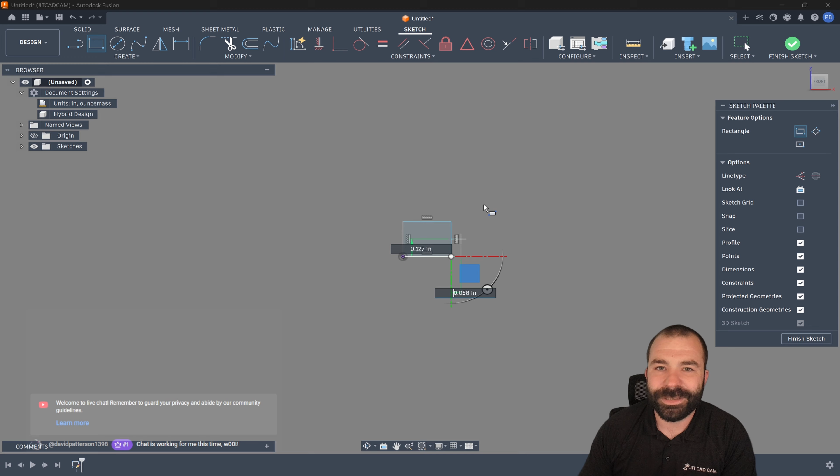As you guys are going to see, we're going to start right off with creating a sketch. This is going to be a side profile. There we go, we got David out there, David's got chat working this time. Again, relatively simple, maybe a little bit here, a little bit there, another rectangle for the taper here.

And then lastly, let's just go ahead and say we have a threaded portion, and we're going to throw a line in here. For the sake of most things here, we're actually going to turn off 3D Sketch because the word on the street is we don't need it. But I'm going to go ahead and dimension the length of this guy real quick, and let's just say it's going to be an 18-inch barrel.

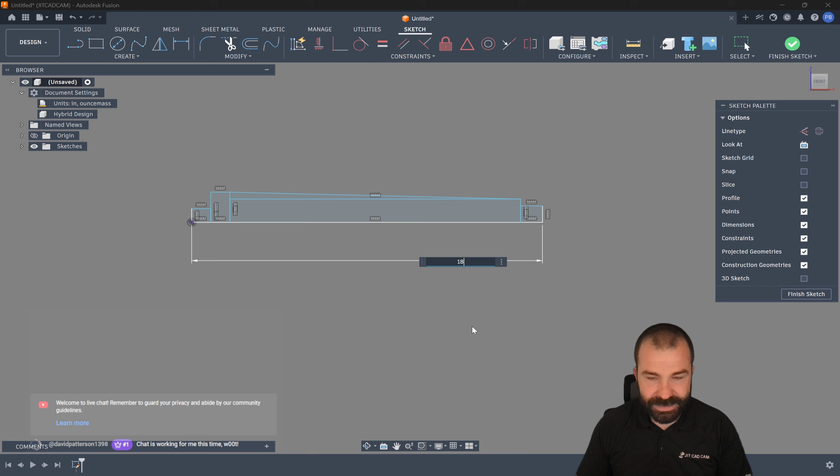I'm pretty happy with this scale because we're going to come back and do some things with this in a moment. So let's get our revolve on all over again. We got our revolve, we got our center axis, and just like that, hypothetically speaking, we have our tapered fancy pants kind of barrel situation going on.

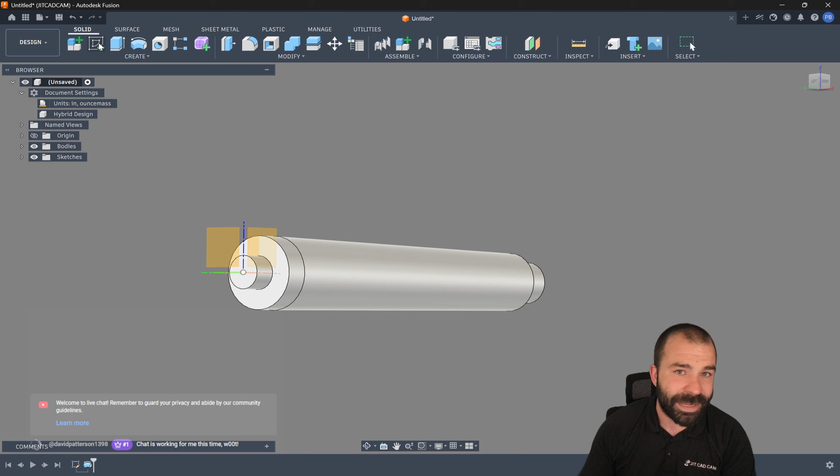Now, what was told to me is that if we were to, hypothetically speaking, I'm going to create a new sketch here because I don't think the sketch is going to matter, but we're going to find out. And we're going to go ahead and do this on the side profile.

I think what I am going to do for the sake of this video, normally you guys see right now I'm in what would be the ZX plane. I'm going to rotate just over to the YX plane, and that way we don't have our sketches overlapping. But let's go ahead and do this.

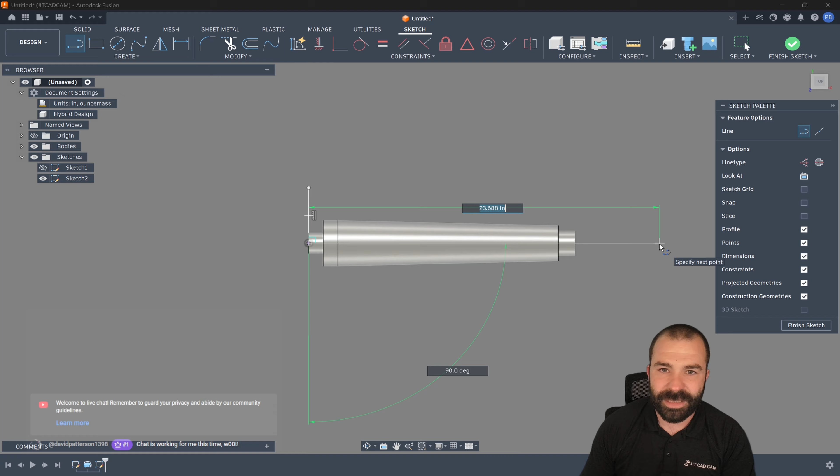So the word on the street is I need a straight line here and then a straight line basically down my profile. Now, normally, yes, we could start this at a certain distance from the end, things of that nature. We could also shorten up the other side. But what I was told is that if we go surface and do, I believe it was a sweep. I might be wrong here.

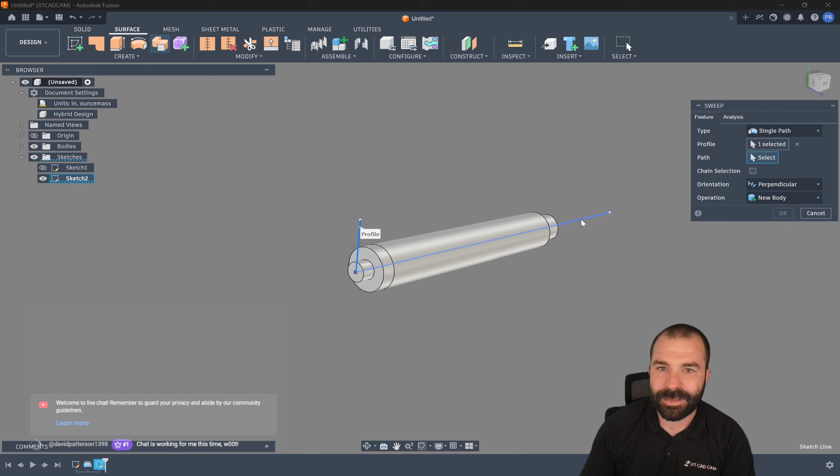We're going to go ahead and not do chain selection. We're going to pick our first one, and then we're going to pick our path. That we are going to get what's called a twist angle. Now, this is true so far. So let's go ahead and give this a twist angle.

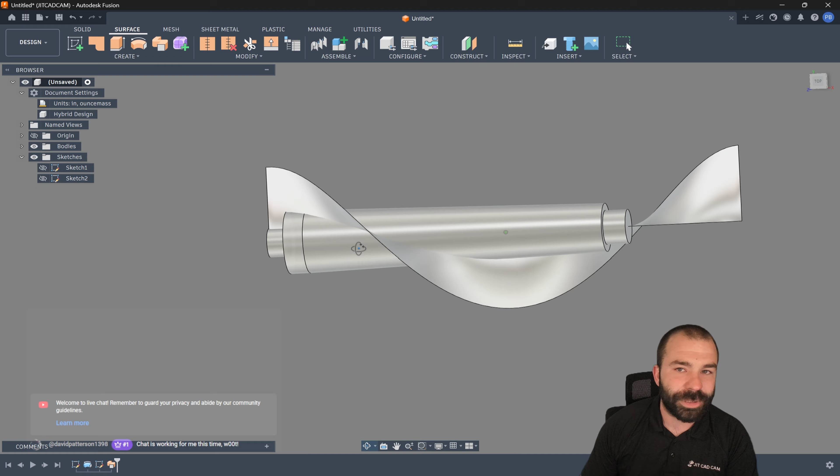So the word on the street was if we were to go 360 degrees, for example, just like that, we have spun 360 degrees around that profile. So that, at the end of the day, could very easily give you your extrude path to cut whatever profile you wanted, right? So again, for the sake of this video, let's go ahead and throw a sketch here on the end.

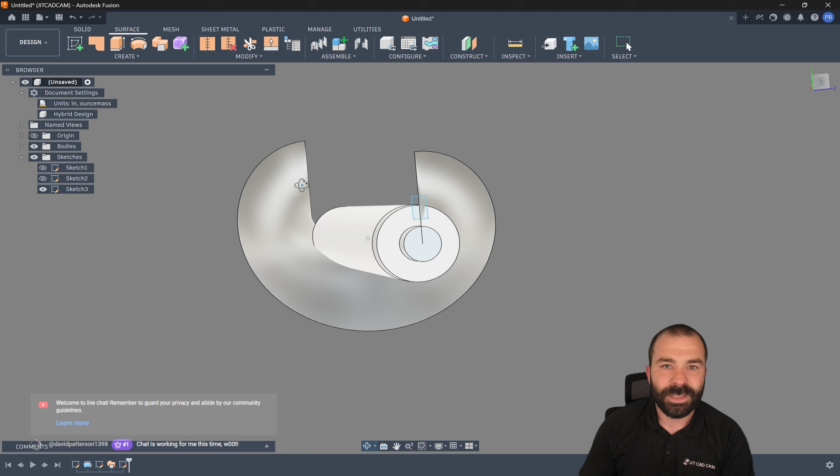As you guys can see, that's the start of my spiral. Again, we're just going to keep everything pretty rudimentary simple this week. And let's just throw a rectangle out here. Now, the problem I already see with this is because of the twist, we're not actually tapering at all. So I wonder if that was thought about.

Now, I do know, and we could do this, this was also brought up pretty good, is if we go back, instead of doing maybe a split body, you could always do what's called a split face. And let's say we're going to split the cylinder here using that coil. What we should get, we don't need to extend that by any means. Let's get that body kicked off now.

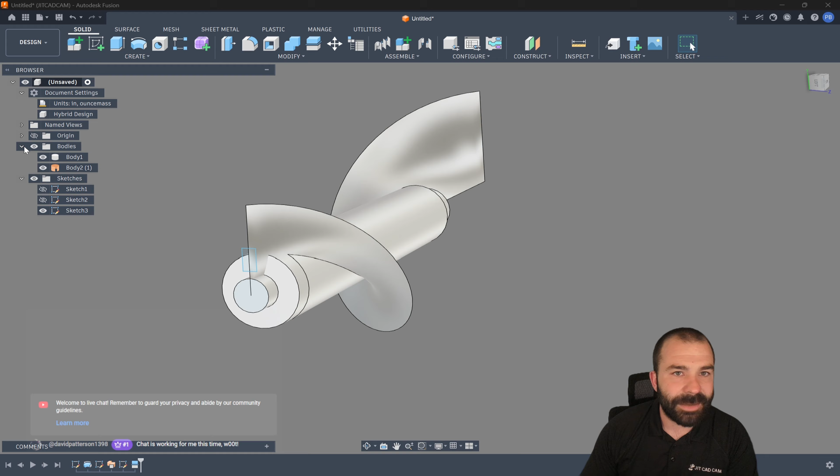I do have what would be considered the path for extruding and revolving around. So I'm going to go ahead and fix that split body because I would like to include this little guy here. I think it's just going to give us a little better path. Now, once again, we could go in, we could do a sweep.

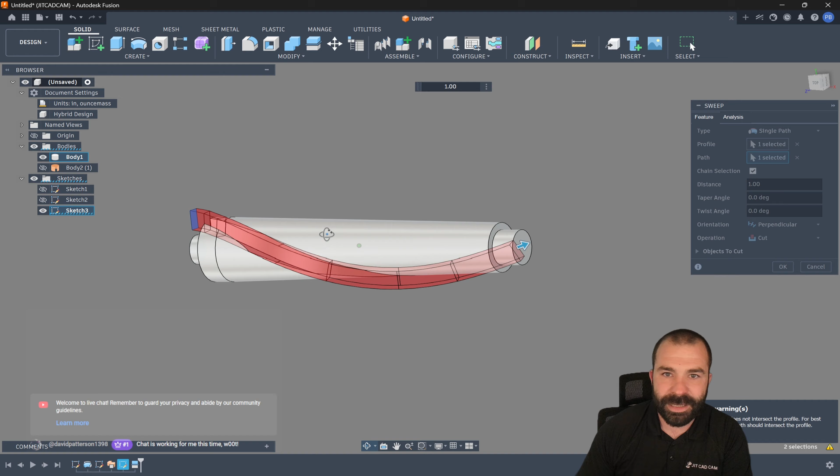If I'm remembering correctly, we did do a sweep along a path. Now we're going to extend that path down and around. If you guys remember, I think we went ahead and did parallel so that it maintains that profile all the way around. However, as you're noticing, it's not staying fixed on center when it loops around.

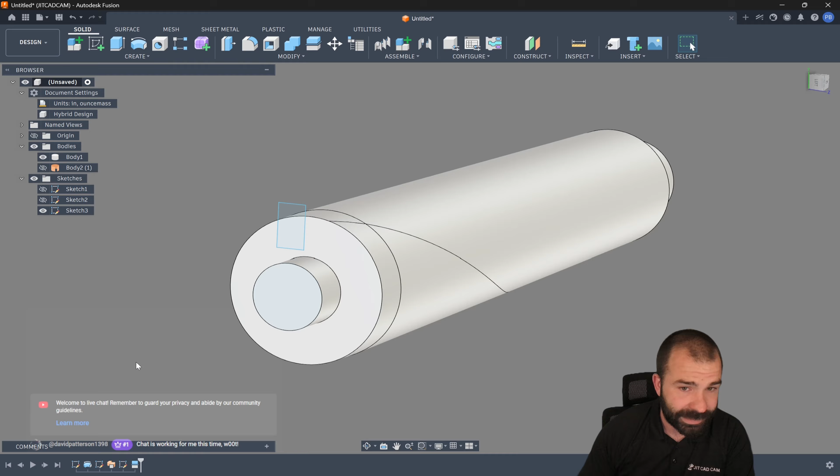This was where we were actually having to do, and again, this is where everything gets fun inside of Fusion, is we may need to reuse that sketch, or I think what we were initially doing is not a rectangle. We were actually doing what would be just a circle. So let's go ahead and get that circle back in here real fast.

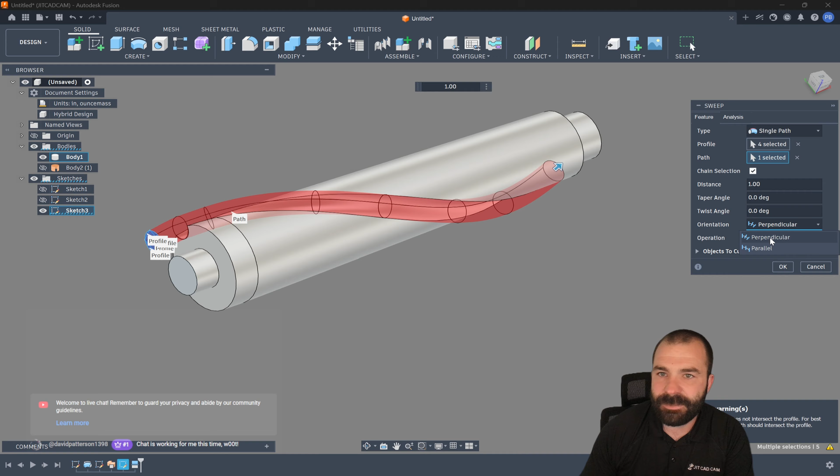And go back to our good old-fashioned sweep, pulling that circular profile along our path. Remember, that path now is that lovely split body edge that we have. And again, back to parallel. As you guys can see, simply enough, that would create that taper kind of profile all the way around.

Now, it is getting a little finicky here. Let's go ahead and go back to perpendicular. I think that is what we wanted, was perpendicular. So again, a little different way to look at it, a little bit different way to go about this. I think we got to be a 1.0.

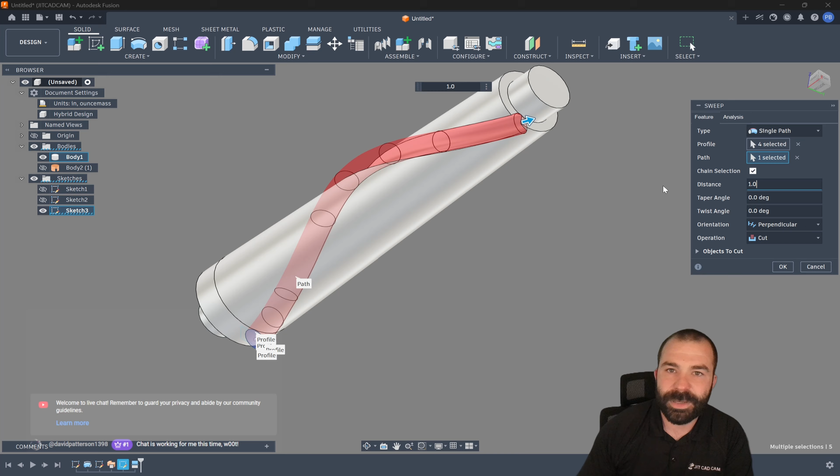Let me know, does this work for you guys? Because at the end of the day, once you get that profile basically revolved around, we could go ahead and go back, circular pattern. This time we're going to do feature, grab that sweep, grab our center of rotation, and then whatever number you want, right? So again, as you guys are seeing, basically gone through and replicated and spun that.

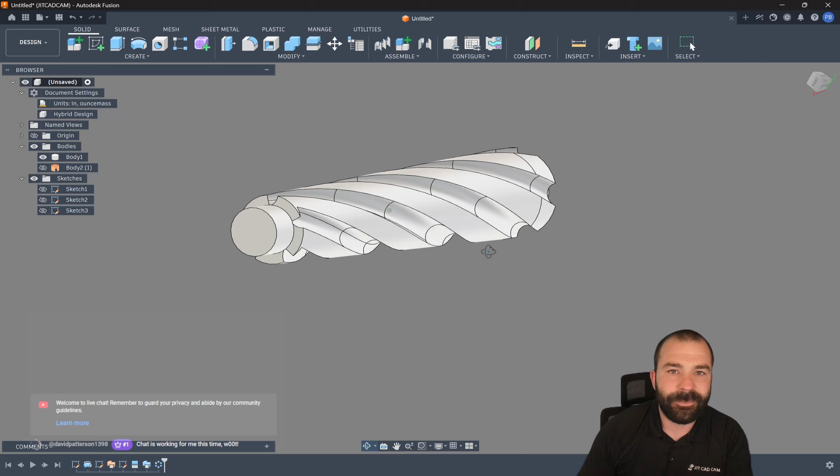Now this is tapered, remember? So there is a taper to this barrel to be able to achieve that. So I see a bunch of you guys in here. This was kind of the first thing that I had to sit down and review and go over. Let me know, what do you guys think?

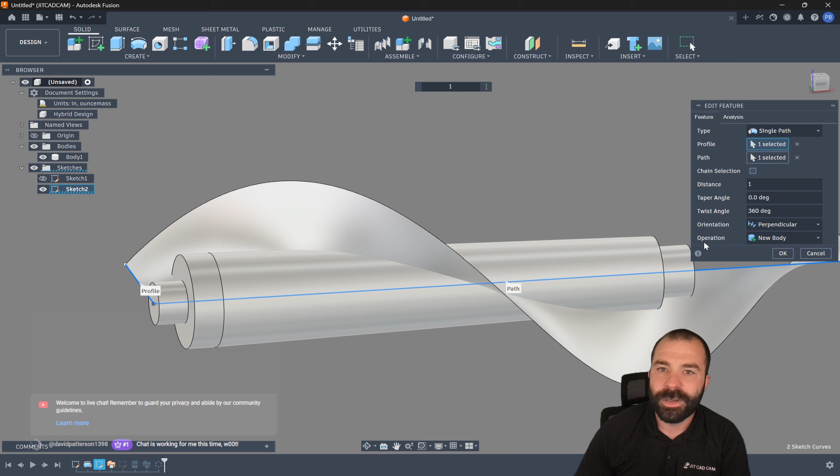I have a couple of curiosities about this. When we did do the sweep, we do have a path, perpendicular. Yep, so you can't start in the middle in this case and go one direction or the other. I'm also curious how taper would work. Yep, so taper is just going to throw that all over the place. Yep, so you can't do a taper and a spiral.

And if we wanted to, we could actually adjust that spiral even more, 720, making it much steeper. And as you're seeing, it's automatically updated and twisted, whatever that pattern that we are working on would.